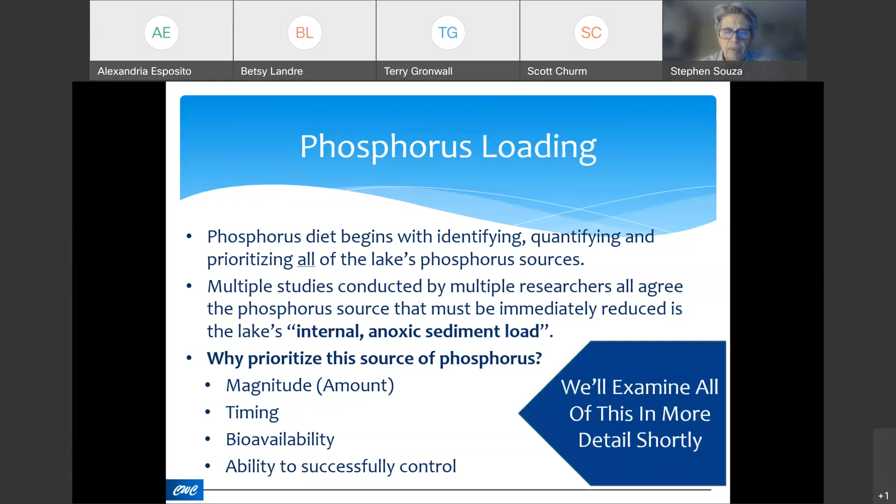But the good news is we know, based on work that's been conducted nationwide since the 1980s, that this internal load is, I wouldn't say easy so much, but it is somewhat relatively easy to control. And more importantly, we can successfully control that load, more so than we can septic loading, more so than we can control stormwater loading. So that's the good news. We have a load that is large, comes at the wrong time of year, definitely very bioavailable, but can be successfully controlled. So we're going to examine all of that for the balance of this presentation.

So let's look a little bit closer at what this internal load means. Where's it coming from? Well, every day, every month, every year, phosphorus accumulates in the lake sediments. This happens with every single lake. So phosphorus washes in with stormwater runoff. It comes in with sediment, leaf litter, etc. Fish die, plants die. That phosphorus accumulates in the sediment of the lake.

Now, the majority of the bioavailable phosphorus, the phosphates, are bound to iron. And that's a good thing. So as long as they can remain chemically bonded to iron, they're not immediately available for uptake and utilization by algae or cyanobacteria. However, what ends up happening is that when there's no oxygen present at the bottom of the lake, or over any sediment, regardless of whether it's at the bottom or close to the edges of the lake, that phosphorus-iron bond breaks down very, very rapidly, and that releases phosphorus very rapidly at a rate that's about 3 to 5 times the normal rate into the water column.

Now, if that released phosphorus circulates up close to the surface of the lake, where there's enough light to support photosynthesis, that internal load in turn causes a harmful algae bloom. So that is what's happening in Honeoye. We have a lake bottom that has a lot of stored phosphorus. We end up with no oxygen at the bottom of the lake at times, and that results in the rapid release of all that phosphorus in the water column.

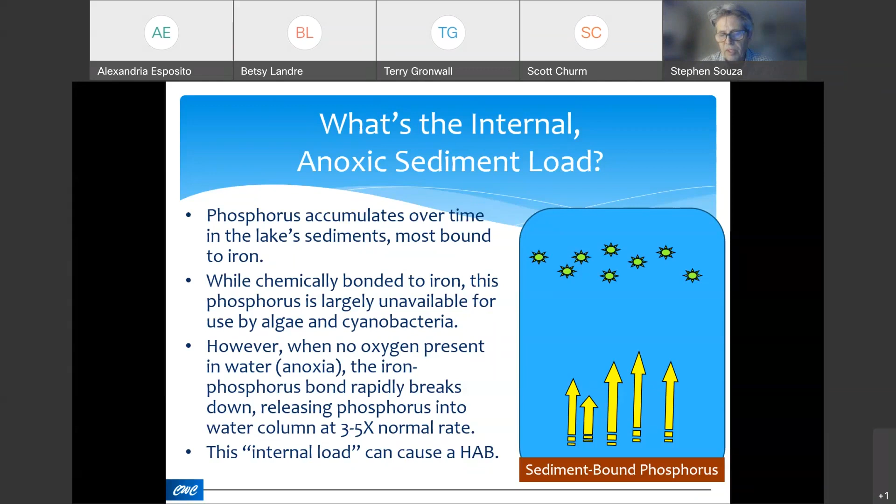Now, as I mentioned, most of Honeoye's internal phosphorus load occurs in the middle to the latter part of the summer, and again, for reasons of longer days, warmer water, better light conditions, that all is ideal in terms of stimulating a harmful algae bloom. The amount of phosphorus that's released, remember I told you there's a lot of phosphorus that's released. It can be as much as 90% of the lake's total annual phosphorus load. That's the phosphorus load coming from every source, stormwater, atmospheric, septic, every source. It can be as much as 90% at times of the lake's total annual phosphorus load, and that amounts to about 7,000 kilograms per year, or roughly about 15,000 pounds.

And these are studies that have been conducted by a number of researchers, again, Dr. Gilman, myself, others, but synthesized in 2 recent reports: the Princeton Hydro report, which was published in 2020 after DEC review, and then 2 DEC reports that I'll touch on a little bit later, a 2018 report and a 2019 report. Now, the significance of that is about a pound of phosphorus, a half a kilogram, can support over 1,000 pounds of algae. So you can see it doesn't take too much phosphorus to start to create problems.

And because, as I mentioned before, the majority of the phosphorus that's released from the sediment is immediately bioavailable, it can easily be assimilated by cyanobacteria and then lead to these algae bloom problems. So this is why we need to control the lake's internal phosphorus load. We need to keep that phosphorus sequestered in the sediment. And if we can do that, then we can decrease the amount of phosphorus that's present in the lake, especially in the middle of the summer. That then lessens the opportunity for a HAB. And I'm going to stress lessens.

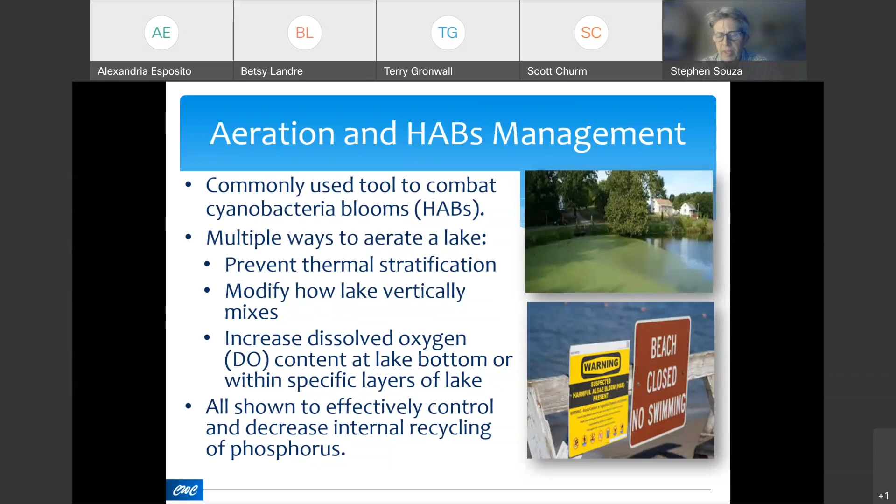Overall, these techniques definitely have been demonstrated, with multiple published papers going all the way back to the 1980s showing that aeration is very effective in controlling that internal recycling. Our project goal was to build on some of the past studies, but develop a relatively detailed engineering design of the most effective system for Honeoye Lake, with our goal being, again, primarily to control and reduce the lake's internal phosphorus load. And that specific goal is consistent with DEC's harmful algal bloom management action plan, as well as the findings of the 2019 total maximum daily load report.

So DEC has the same mindset that we need to reduce the internal phosphorus load, and aeration is one of the primary ways of doing so. And then with that, again, if we can do point A and point B, then we can limit the occurrence and severity as well as duration of harmful algae blooms.

So before we can talk about aerating the lake and what we're going to do and why we're going to do it, we need to talk a little bit about water itself, and specifically the thermal and density properties of water. So as water temperatures start to climb above 38 degrees Fahrenheit, the density of water starts to decrease. So warmer water is less dense than cooler water. And that leads over the summer to distinct depth zones of warmer but less dense water close to the surface of the lake, essentially sitting over cooler, denser water that's closer to the bottom of the lake, almost like oil sitting over water.

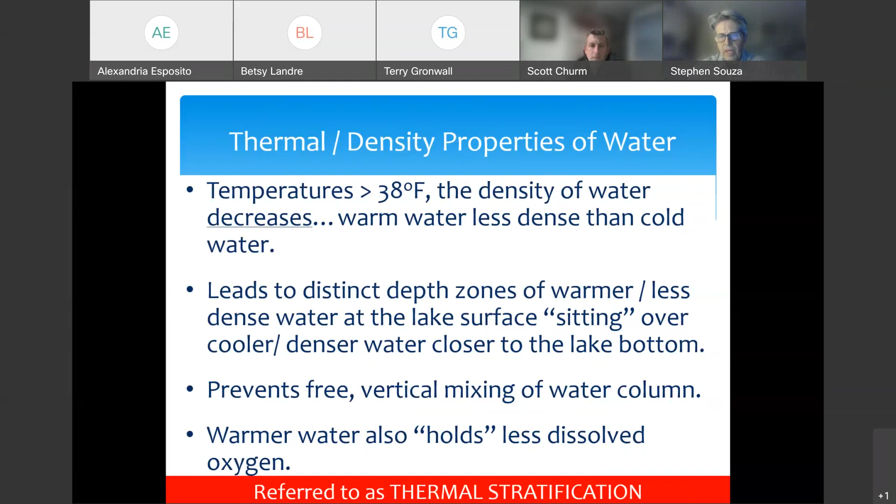But those density and thermal property differences lead to what is called thermal stratification, that layering, which prevents the free mixing of the water column. What ends up happening when we restrict the free mixing of the water column is that we impede the ability of all of the lake water to become naturally reoxygenated. And that normally happens as a result of water being exposed to the atmosphere.

And so at this time of year, as I'll show graphically, it's very easy for the lake to mix vertically, even at its deepest points. And as a result of that water being swept back up to the surface, exposed to the atmosphere, it becomes reoxygenated. So the lake has a high amount of oxygen in the water column.

However, when we end up stratifying the lake, we end up with these layers in the lake. The deeper waters of the lake, because now they cannot mix freely up to the surface any longer, become quickly depleted of oxygen. And that's because of all the bacterial processes that are occurring in the sediment, all the decomposition. There's a lot of respiration that occurs that utilizes oxygen.

And as a result of that, in very short order, days, you can have zero oxygen at the bottom of the lake. And when you have zero oxygen, no measurable dissolved oxygen in the water, that condition is referred to as anoxia. So, some terminology, but this is terminology that we end up using throughout the report. So it's good to familiarize yourself with some of this.

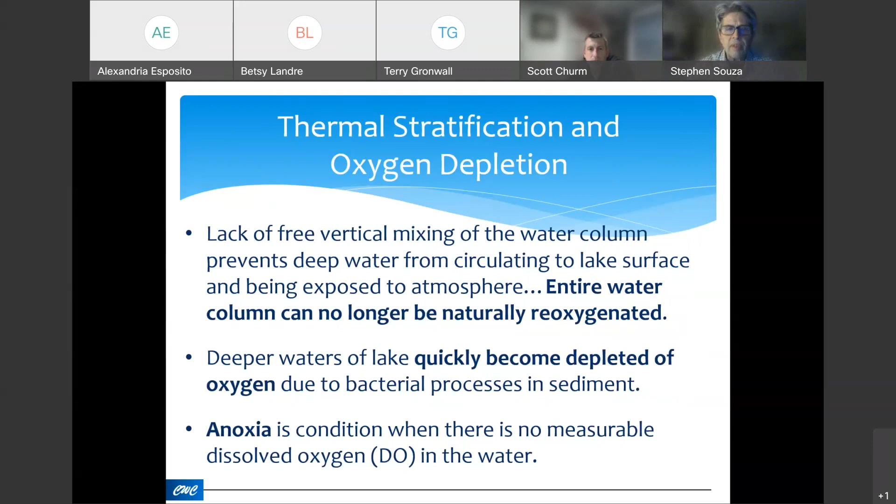In the summer, though, we have longer days. Air temperatures are warmer, and very quickly the surface of the water becomes warmer. And as a result of that, it becomes less dense. And so now you end up with that layering that I referred to previously. And when there is enough resistance to that mixing, we end up with what is referred to as a thermocline.

Now, we've all experienced this. You dive into the lake in the middle of the summer, it's really warm at the surface, and all of a sudden it gets cold really quick, and you've broken through the thermocline at that point. You've gone from that warm, less dense layer into that cooler, denser water. But that thermocline prevents the vertical mixing of the water column. It takes a lot of energy to break down that boundary layer.

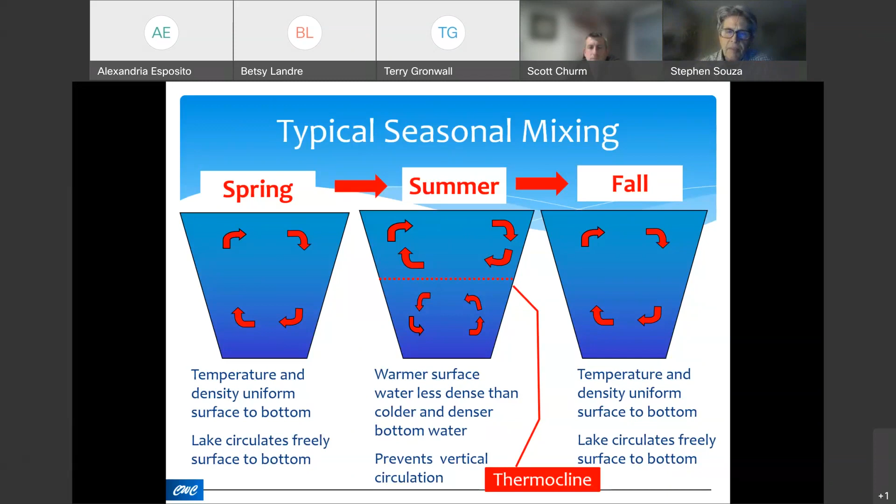So a little bit more terminology that we need to touch on: the epilimnion, the upper layer of the lake, where it's warm, plenty of sunlight to support photosynthesis, and it's oxygen rich. The metalimnion, or that middle transitional layer where the thermocline exists, cooler temperatures, typically measurable amounts of oxygen, and maybe not enough light for photosynthesis.

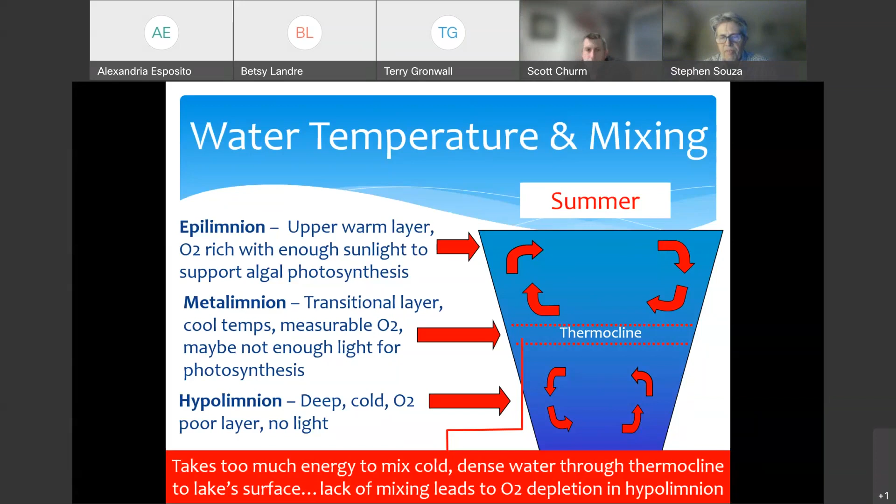The deeper portion of the lake, though, referred to as the hypolimnion, is cold, remains cold throughout the summer, but it's oxygen poor. And on top of that, there's not enough light down there to support photosynthesis. But as I mentioned before, that thermocline, that boundary, really is a restrictive horizon that prevents that bottom water from mixing to the surface.

And graphically, again, we can look at this, a little bit of terminology, but that oxic zone where there's plenty of oxygen, think of it where there's enough oxygen to support a variety of different types of aquatic life, aerobic life, including fish. The thermocline, that middle boundary, and then the bottom of the lake, the hypolimnion, which is anoxic, no oxygen at all, or hypoxic, meaning that there might be a little bit of oxygen, but not enough to really support fish life.

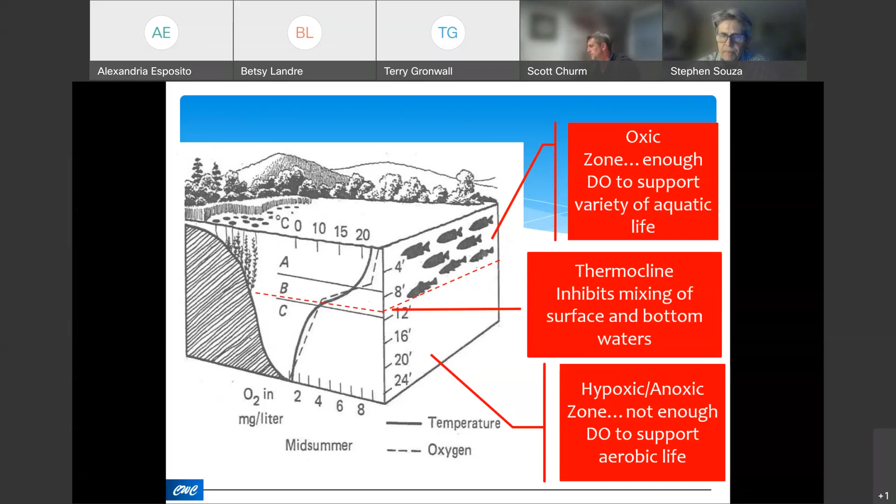Okay, so the stratification impacts: when a lake thermally stratifies, not only Honeoye Lake, but other lakes that thermally stratify, that sets into action a whole bunch of biological and chemical changes. And even if this only persists for a short amount of time, days, not months, but days, that can result in some significant impacts. Primarily the loss of oxygen down at the bottom, referred to as hypolimnetic anoxia, and a tremendous amount of phosphorus released from the sediment, referred to as internal phosphorus recycling.

That internal phosphorus recycling can stimulate algae blooms if some of that phosphorus makes it up to the surface, as well as cyanobacteria-supported harmful algae blooms. And in severe cases, thermal stratification and anoxic conditions can even lead to fish kills. So aeration can be used to manage thermal stratification, it can be used to mix the lake, it can be used to correct deep water anoxia, and it can be used to manage that internal phosphorus load.

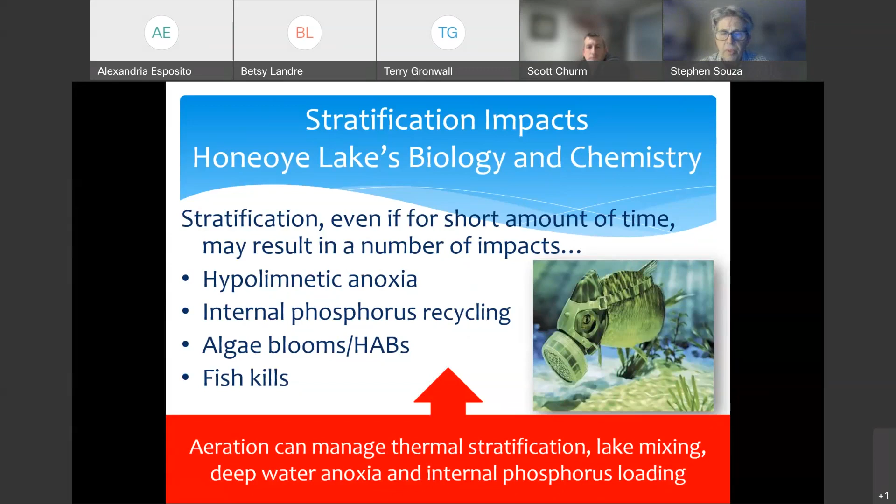Okay, a little bit more terminology. Limnologists love terminology. We love to put things into little boxes and put little stamps on things. But a lot of lakes, particularly deep lakes, tend to stratify and destratify 2 times a year. And those are referred to as dimictic lakes. They have very stable water columns. So there might be a little bit of turnover that happens in the spring during ice out, and there's a large amount of turnover that happens in the fall, that autumnal turnover. But dimictic lakes only turn over twice, once in the spring and once in the fall. So during the summer, the water column is very stable.

Polymictic lakes, which are very common in the Northeast, tend to stratify and destratify multiple times. So although they stratify, the thermocline is somewhat weak. It's enough to typically keep it in that thermally stratified state, but it can be upset, it can be broken down at times. So the water column tends to be much more unstable. And you'll find that there's multiple occasions during the summer where the deep water flips between an oxic state, presence of oxygen, and an anoxic state, no oxygen.

Honeoye Lake is a polymictic lake. And a lot of the data collected by Dr. Harrison demonstrates that unequivocally and actually sets the stage for why that happens and why that thermal stratification breaks down, sometimes multiple times during the summer months.

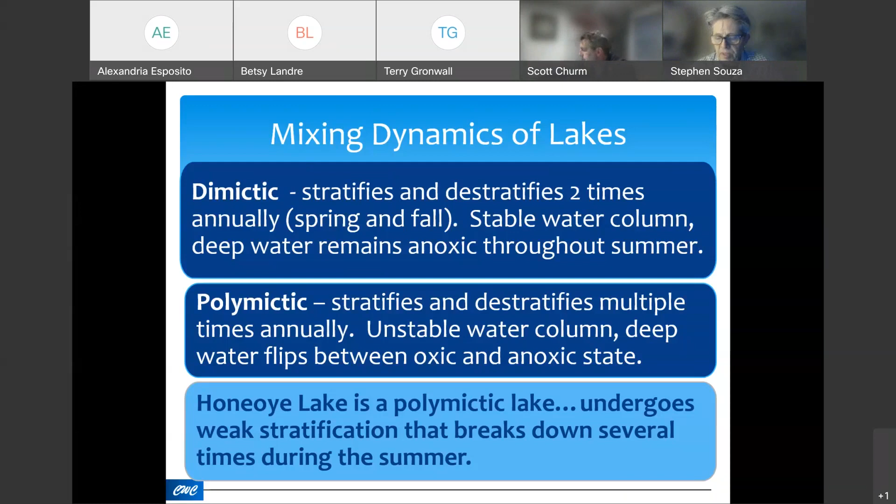Okay, so how can we reoxygenate the bottom of the lake? As I mentioned, there's 2 different approaches. We can mix the water column, circulate it vertically, prevent that thermal stratification, and maintain the exposure of the entire water column, including the deep water, to the atmosphere. In doing so, we maintain oxygen levels throughout the entire water column.

Or we can oxygenate the water column and actually infuse or inject, quote unquote, pure oxygen into that deeper water. We don't alter the thermal profile of the water column. We're not mixing it, but we are introducing oxygen down at the bottom that does what we need to do, and that being maintain oxygen levels in the hypolimnion, thereby keeping all that phosphorus bound to iron. And that can be done without altering the thermal profile of the water column, without destratifying the water column.

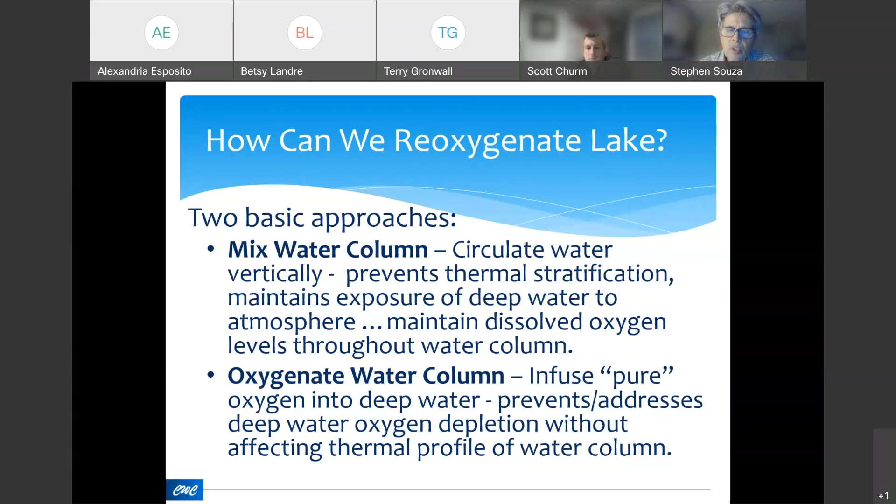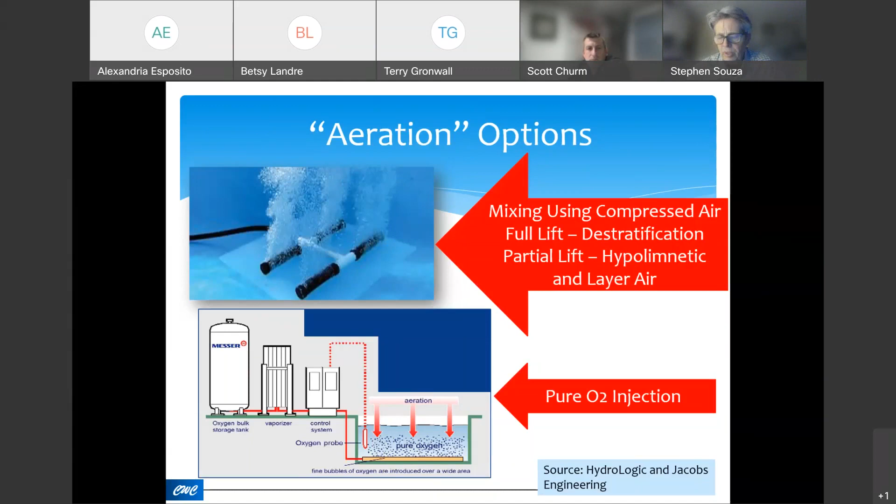So graphically, mixing options utilize compressed air to either partially mix the water column or fully mix the water column. And then we have pure oxygen injection systems that are utilized to introduce oxygen down to the bottom of the lake, or whatever level we would want to introduce it, but at the bottom of the lake in our case, and maintain oxygen levels without altering the thermal profile of the water body.

So full lift, partial lift. Full lift is what has been proposed in the past for Honeoye Lake, referred to as a destratification system. And they're very effective for deep to shallow polymictic lakes and used quite extensively throughout the nation. Partial lift systems are more designed for deep dimictic lakes. You may know some of the terminology, hypolimnetic systems or layer air systems.

But really, the bottom line is that for Honeoye, being a polymictic lake, full lift destratification has been identified as a viable option. It's something that I identified as an option back in my 2007 report, and has been identified as an option in multiple reports by others, including DEC.

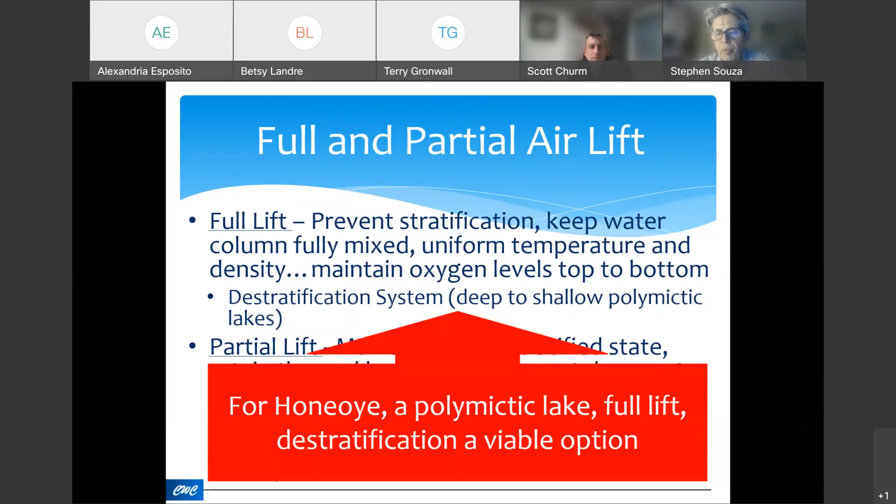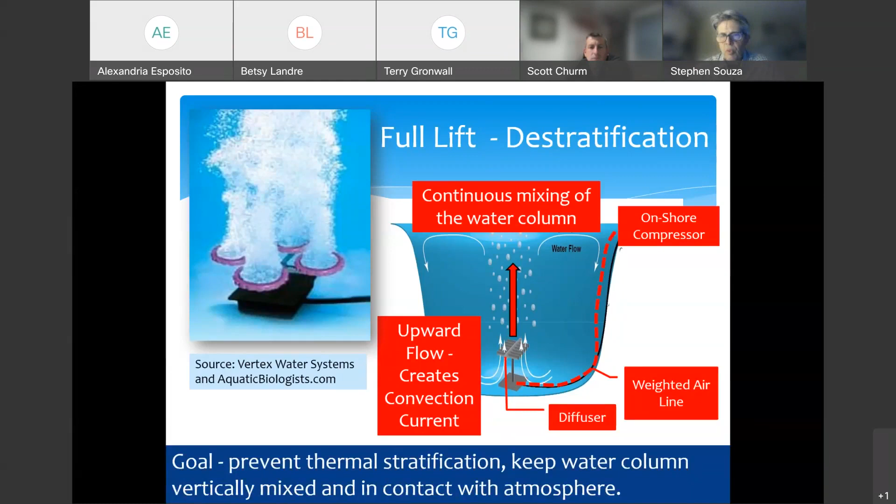So again, just a graphic, and I want to just emphasize here that the compressed air is not what oxygenates the lake. It's the moving of the water column, creating almost a convection current, like boiling a pot of water, and keeping that water column moving, exposing the water to the atmosphere and then allowing it to reoxygenate.

The original concept was actually discussed in detail in the report that was published by Princeton Hydro in 2020 after a review by DEC. That report was actually finished in about 2018, but went through extensive DEC review. It called for a destratification system consisting of two 125 horsepower compressors. We looked at two locations, but at that time settled on Sandy Bottom Park, the north end, as the location because of the availability of the correct type of power.

Those two compressors would provide compressed air to 24 diffusers. But that amounted to not only 24 diffuser setups on the bottom of the lake, but also almost 300,000 feet of airline on the lake bottom. All of the land equipment could be placed in a 20 by 20 shed, and that compressor house would be fully insulated, sound deadened, etc.

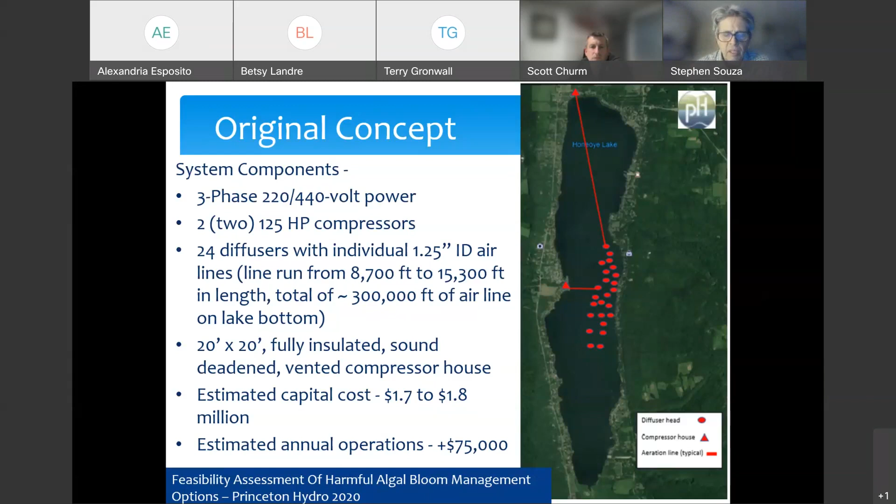The estimated capital cost for that project was between 1.7 to 1.8 million. That's for the construction, installation, permitting, everything that it would take to put the system into the lake. And the estimated annual operating cost was upwards of $75,000 per year to run that. So that is presented in detail in that 2020 report, as I said, which was done for DEC and published in 2020.

There's better ways to do that. And luckily, we had the ability to work with Dr. Paul Ganser and look at these pure oxygen systems. And one of the systems that proved to be particularly effective, potentially effective for Honeoye, would be a side stream saturation system. And as I said, this does not require the full mixing of the water column, so that we're not disrupting the thermocline. And yet what we can do is have a much more precise means to maintain deep water dissolved oxygen concentrations.

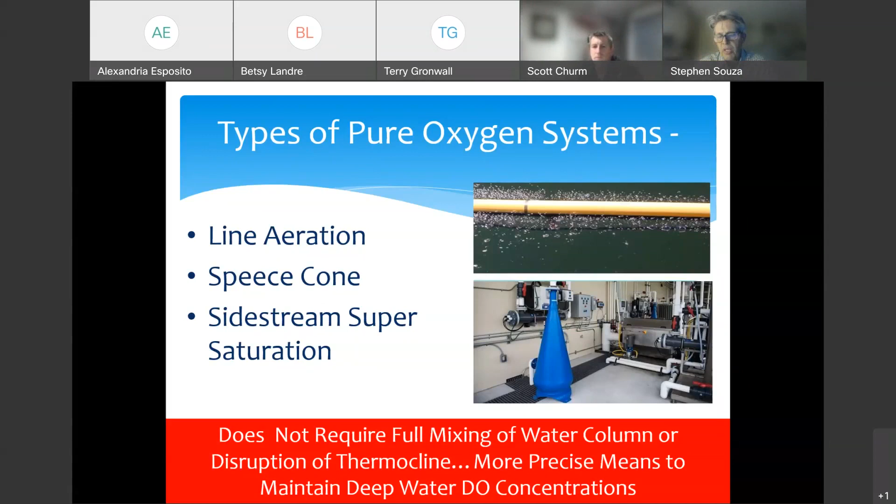We're not at the whim of water temperature or the amount of exchange that's happening with the atmosphere by moving that water up to the surface. We're actually injecting oxygen into the bottom of the lake, into our targeted zone.

You'll be seeing a couple of other examples of the system, but just in cross section, essentially it's a pretty simple system where we have pumps that pull water out of the deepest portion of the lake, bring that into a pump house, mix that water with oxygen, and then that water is returned back to the bottom of the lake. And again, this is all done without disrupting the thermocline and without creating these really immense underwater eddies. None of that occurs with this type of system.

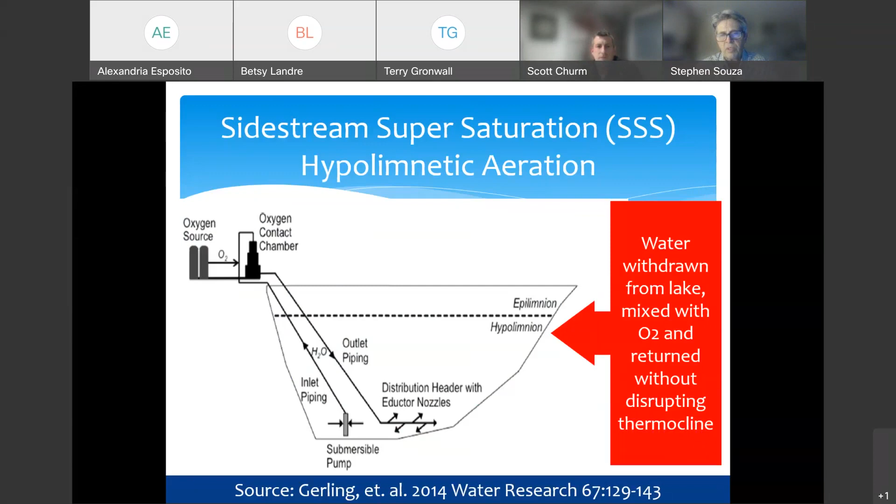Some of you may be wondering, where does this oxygen come from? And yeah, there are certain systems in place around the country that actually have on-site oxygen storage, which means a tank truck needs to come every couple of weeks or so and deliver oxygen. That's not what we're going to be doing. Our system is designed for on-site oxygen production, and this uses technology very similar to what is used in hospitals around the country to produce oxygen. So there's no need for these large outdoor storage tanks, and even the equipment that is interior to the building is relatively small.

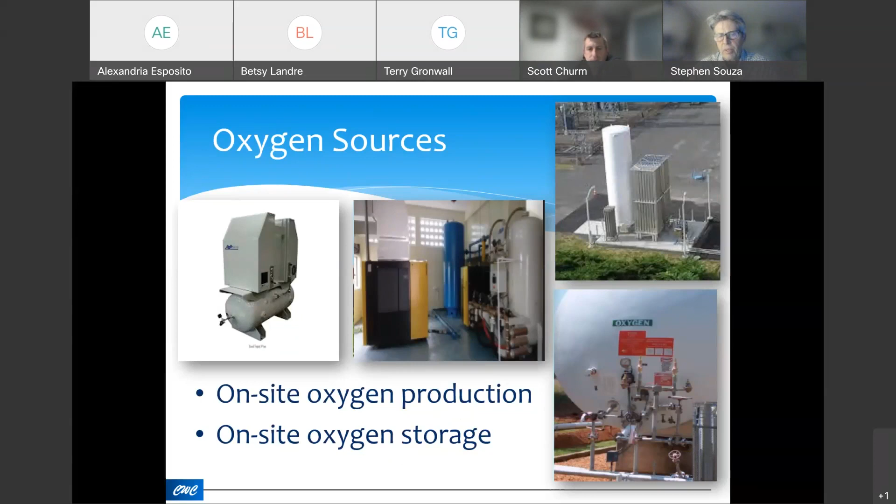So on-site oxygen generation, and Dr. Gantzer is here, and he'll be able to answer some of these questions better than I can. But essentially, the guts of the system is a pressure swing adsorption unit. And what that does is strip nitrogen from compressed atmospheric air. So we're pulling air from the atmosphere, it's being compressed, and then we're stripping nitrogen from that atmospheric air, nitrogen being the most prevalent element in the atmosphere. And by doing that, we can maximize the amount of oxygen that is present in that compressed air.

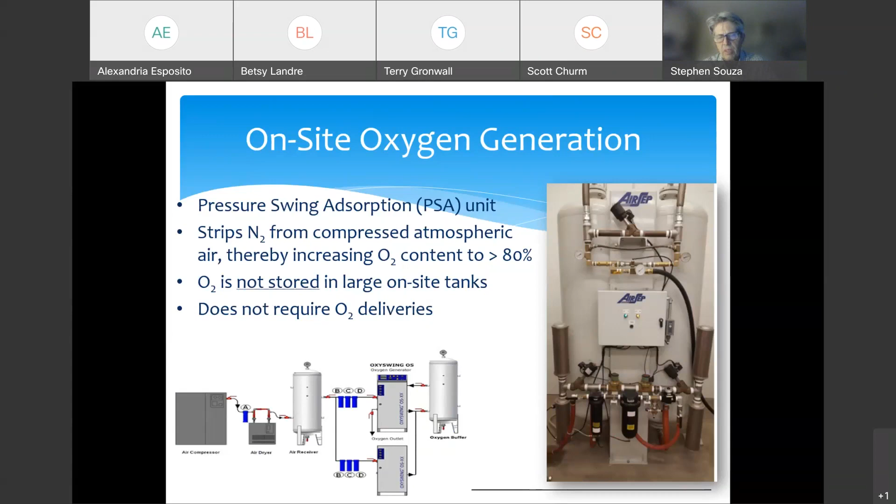So there's no need to store this in very large tanks. The air receiver that is used to store the compressed air is about the size of what you would see with a typical destratification system or any other type of aeration system. So you don't have to have any tank trucks delivering oxygen to the site. It's not like we have large cylinders of oxygen inside of the building, et cetera. And like I said, this is the same type of technology that's used at hospitals around the country.

We'll come back to this, and I've got some different graphics that show this a little bit better, but for comparison to the destrat system, we're only in need of one 20 horsepower compressor as opposed to two 125 horsepower compressors.

That AirSep model pressure swing adsorption unit, as I said, is sort of the heart of the system. We have 2 water pumps, each one at about 15 horsepower. There are parallel water intake lines, parallel water intake and discharge manifolds, and everything is stored in a building on the land components, in a 20 by 20 to 20 by 30 fully insulated, sound deadened, and vented pump

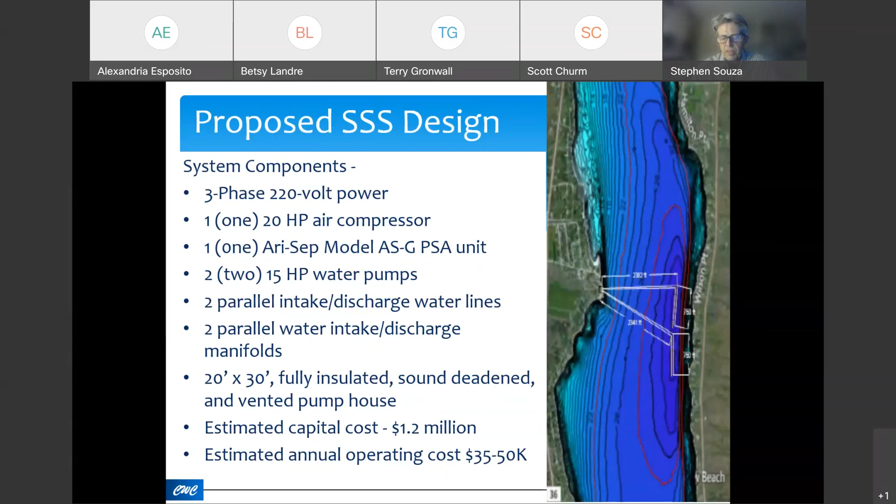house. The estimated capital cost with this system is 1.2 million, so significantly less than the D-Strat system. And the key thing here is that the annual operating cost is between about $35,000 and $50,000 per year. So again, significantly less than that associated with the D-Strat system. So how is this saturated system better than D-Strat aeration?

Well, number one, as I mentioned before, and I'll reemphasize this, we don't disrupt the thermal properties of the lake. We're not relying on the atmosphere to do the reoxygenation, so we have much better control of the amount of oxygen that's at the bottom of the lake. We direct the oxygen to that portion of the lake that needs it the most, and that is the hypolimnion. So we can direct it to the deep water portions of the lake and maintain it in an oxic state. And it's a much more reliable means than destratification or hypolimnetic aeration of creating and maintaining deep water fish habitat.

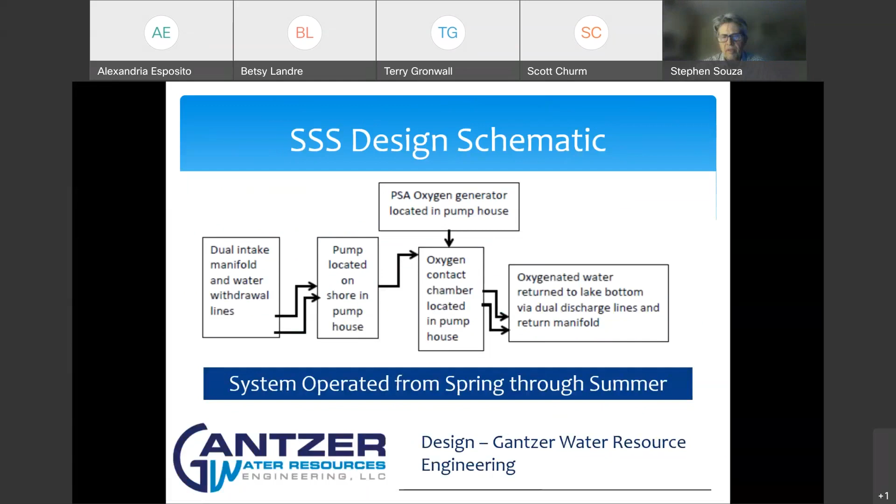So this is the schematic again. As I mentioned, Dr. Gantzer is with us tonight. He can talk about the various elements, but this is similar to what I showed you pictorially a couple of slides back. Intake manifold, intake lines, brings the water into the pump house. The water is then mixed with oxygen and then returned to the bottom of the lake via discharge lines in a return manifold.

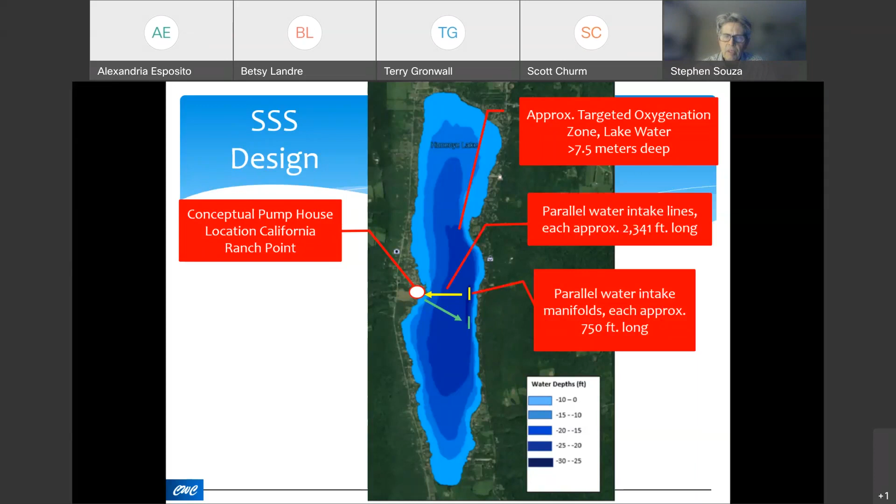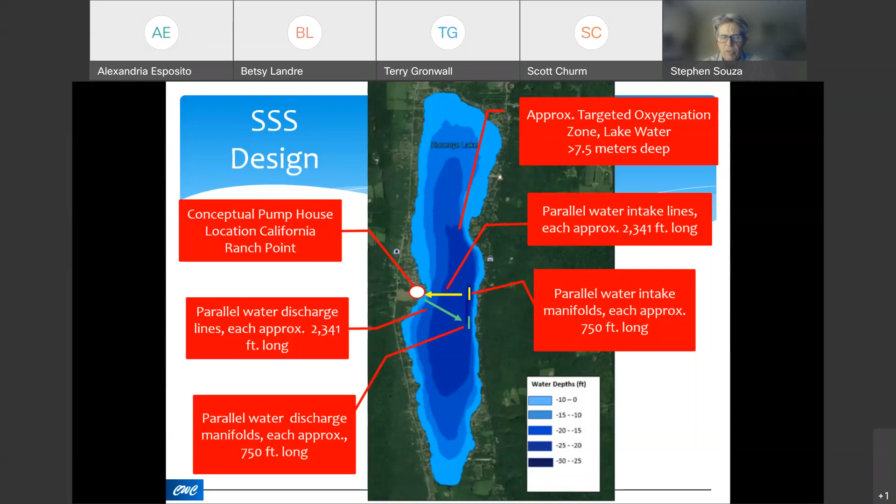All right, so the components here again, there are 2 parallel water intakes, each about 750 feet long. Those draw in water at a very nominal rate. That water is then pumped into the pump house via 2 parallel intake lines, each about 2,300 feet long. The water is mixed with oxygen and then returned again via these 2 parallel discharge lines, again about 2,300 feet long, and then discharged at a nominal rate at the bottom of the lake via 2 discharge manifolds, each about 750 feet long.

And so even with 2,300 feet of line, we can keep that line down at the bottom, but at the same time, when we need to raise it for servicing or inspection, it can be easily raised. These lines are extremely durable. Hooking them is going to be no problem. Even anchoring, if an anchor gets stuck on them, that's not going to be a problem. The anchor line will probably break before the air line does.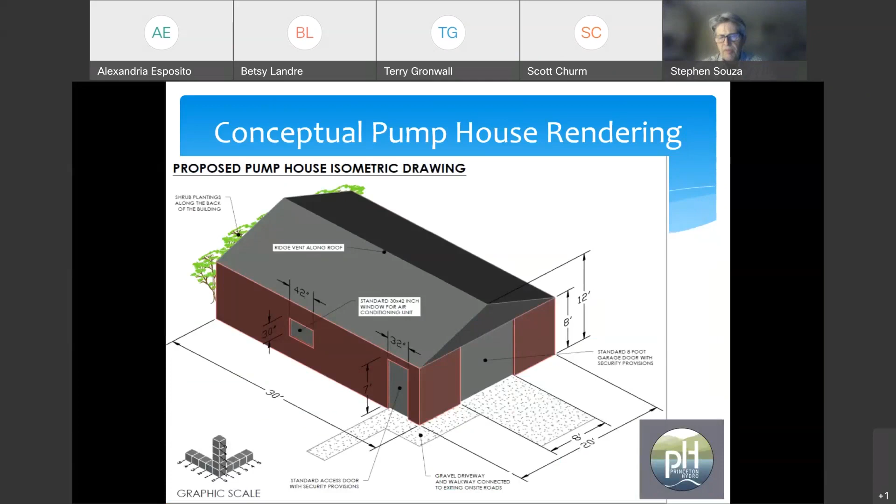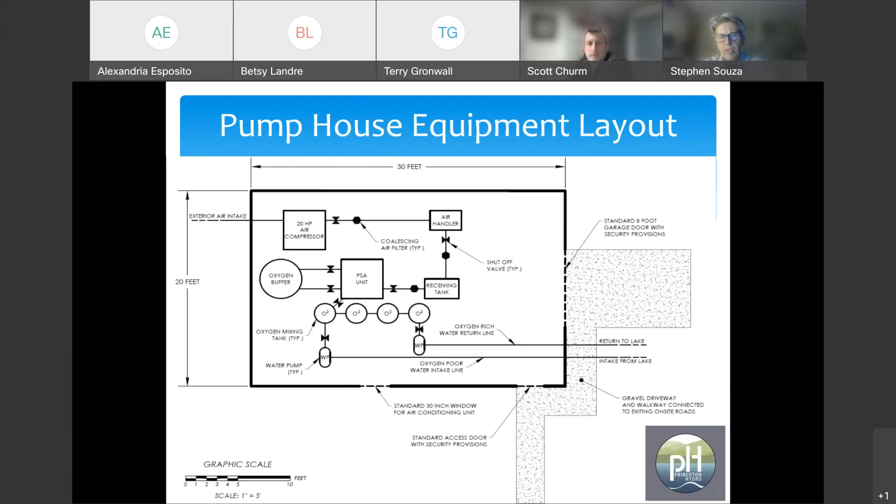There'll be security. We'll try to screen this as best as we can using a combination of vegetation and maybe some fencing. And then within the unit, you can see basically the general layout of all of the equipment. So there's plenty of room in a 20 by 20 or 20 by 30 building for all of the equipment, easy enough to get to, service, inspect, etc.

So the benefits of side stream oxygenation really are that multiple studies have shown it to be extremely effective at controlling and decreasing internal phosphorus load. That's our primary goal, okay? And compared to destratification systems, lower capital cost, and definitely lower long-term operational costs. And as I mentioned previously, for this system, estimated capital cost of about 1.2 million and annual operating costs between 35 and 50,000.

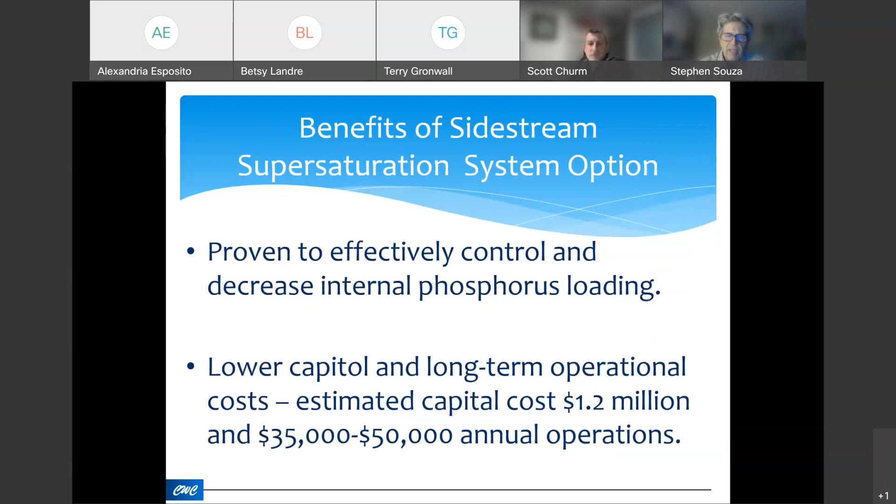The other benefits of side stream oxygenation is that, as I mentioned previously, we're not at the whim of the water density, temperature, DO relationship. So it's not affected by any of those limitations. We're not affected by any daily changes in water or atmospheric oxygen exchange rates.

The big thing is that, again, it does not alter the lake's thermal profile, and we can specifically target where that oxygen is going to, making sure that we're extremely efficient in oxygenating the bottom of the lake. And that has the secondary benefit of increasing fish habitat at the bottom of the lake year round.

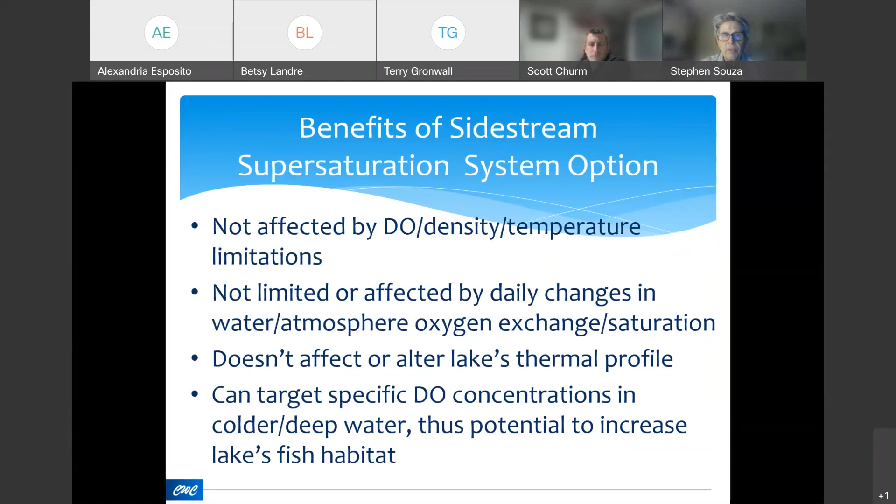I'm going to turn the presentation over to Betsy and Terry, and they'll just talk about the next steps associated with the project. So go ahead, guys, take it away. I'll stay on here, but go ahead. All right, thank you, Steve. This is Terry Gronwall again.

And I do want to emphasize, I forgot to emphasize it in my welcome, that you can think of this project that we're sharing with you as a feasibility project. You can think of it as trying to answer the question, is aeration a cost-effective way to reduce the frequency and severity of harmful algae blooms at Honeoye Lake? So this is not a meeting to make a decision, yay or nay, but we're sharing our findings. And thank you very much, Steve.